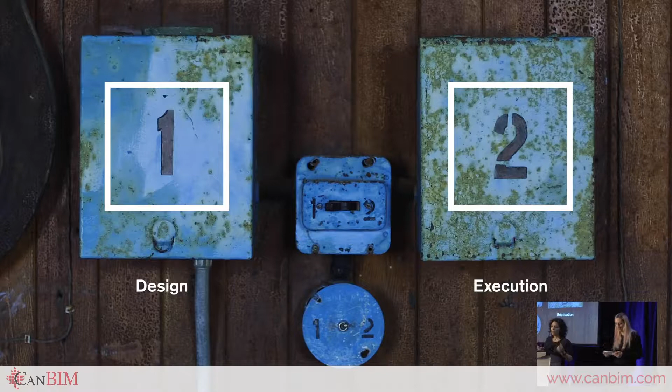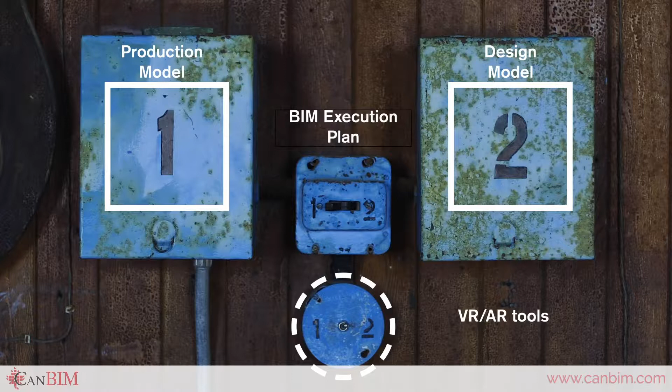As you know, traditionally, you prepare a design, work hard, and then you move straight into execution. With BIM, we realized that we began to work on a production model versus a design model, and the two were alternating constantly, each improving the other. With this rapid, iterative, repetitive process, we were able to extract the most up-to-date information that was best coordinated at any moment in time.

To draw a parallel with this consolidation project, we were consolidating our views through virtual reality. In the project context, it's about the Complexe Desjardins revitalization.

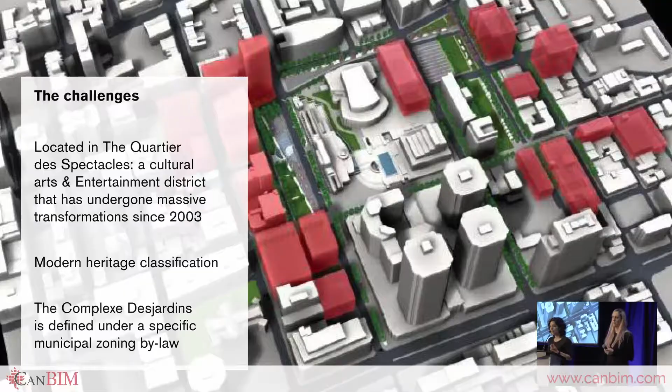It dates back to the 1960s, which is now part of the modern heritage of the city of Montreal. It's regulated by special project regulations. It's part of a new district inaugurated since 2003, called the Entertainment District.

Our mandate was to integrate Complexe Desjardins into its neighborhood and to be able to demonstrate all of its values and functionality. As you may recall, Complexe Desjardins has a central square area inside, often used for various events. It's basically a shopping mall with storefronts, 3 office towers, and a hotel, all connected to the underground city in Montreal.

We began our study in 2014 with a master plan, then developed a technical feasibility study, then plans and specs. Last year, 2 phases were in construction, and this year we're in phase 3, currently underway.

There were 5 different strategic interventions for Complexe Desjardins. 3 were active. The first was divided into 2 construction phases, and the second and third were twinned into the 3rd construction phase. So while the first one was being built, we were working on the concepts and other elements for the overall project vision and to ensure everything was consistent.

For the last one, we divided into 13 stages of execution to carry it all out, and the deliveries were all simultaneous over a scale of a year.

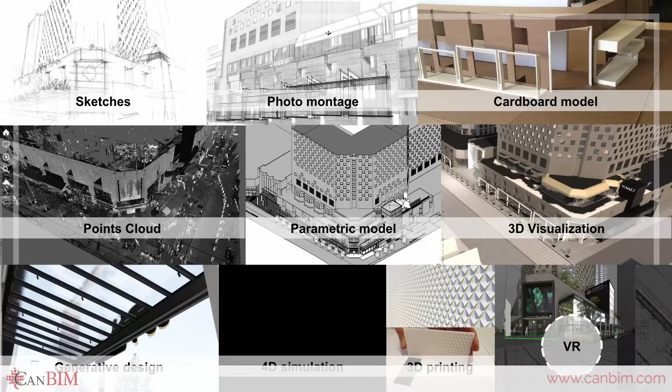We wondered how on earth we were going to be able to communicate. It was such a complex operation. How could we do this as efficiently as possible? So we began with more traditional methods such as drawing, hand sketching, physical modeling, physical mock-ups, and then photos.

Basically for more fundamental design phases, when you're thinking about all kinds of different directions. After that, we started a visualization model based on a parametric model, but we couldn't be sure how accurate it was. We also looked at point cloud data for a more accurate model.

So we would move forward with our visualization and then have the parametric model follow as our decisions were being made.

And then we added exploration using generative design for graphics and for surface motifs. And then we had 3D printing, which we were testing for our surface patterning.

Then we had a 4D model so that we could see the complex phasing of the different work, and then it was all visualized largely in virtual reality. As I was mentioning earlier, this was an opportunity for us to combine our views and avoid redundancy of 3D views and all the various renderings.

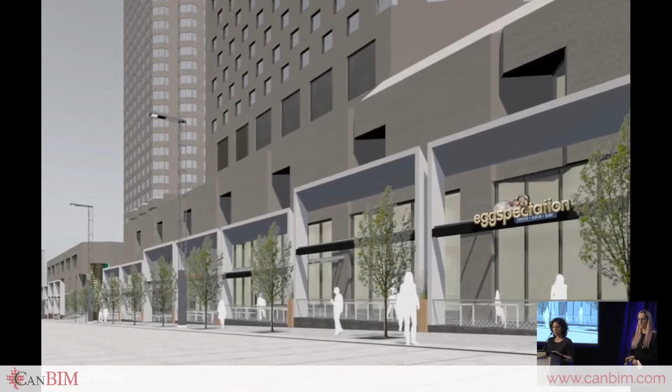Our first intervention in which we used virtual reality was to reposition Complexe Desjardins on the main street of the entertainment district, which is St. Catherine Street. There were already storefronts, so we wanted to have a sort of urban loggia, and each area is defined by a high-performance concrete surround with a beam so that we could have uniform signage and also have rain gutters to redistribute the water.

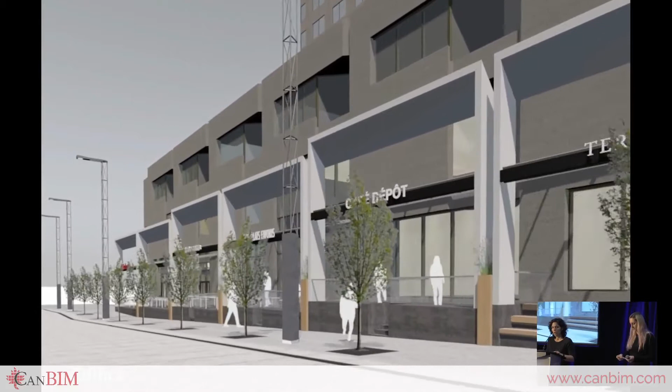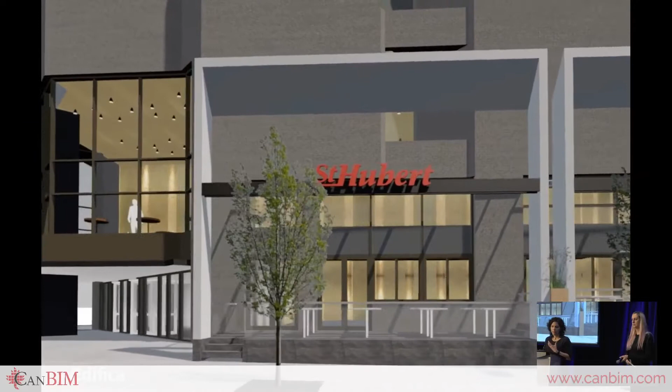Then we had a movable technical floor at the same level as the inside of each of the stores. Every loggia was really similar to one in a theater.

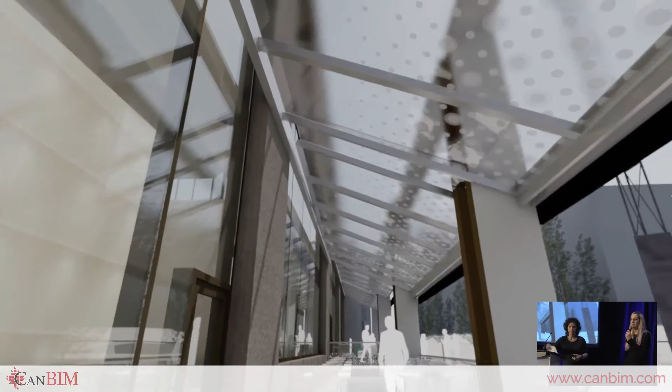So here's animation with our 3D visualization, but we still saw that we couldn't tell what it was going to feel like on the terrace. You need to feel good. How do you know that it's going to feel right?

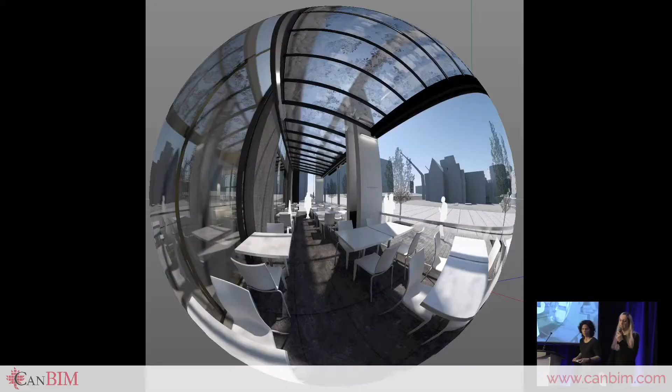So the strategy was to have fixed virtual reality views using a stereoscopic photosphere. This gave us an opportunity to see all the different elements. We'd already decided we wanted to create an arch and have some glass, but we didn't really understand the dimensions and the materiality. So we could look at various options and see immediately how they would interact with each other and what the atmosphere would feel like.

In conventional media, what's often missing is the ability to see how it feels to be somewhere. We often talk about virtual reality presence. For us, this meant that rather than looking at a picture and asking, do I like what I see, we were saying, do I feel good here? Does it feel right? That's what you can't get with any other medium. So we are no longer looking at something, we are inside of something.

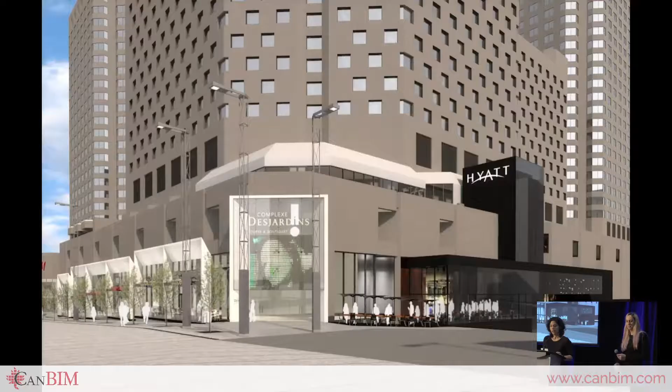For our second intervention, this was our interface with Jean Mance Street, where the hotel's entrance is. The hotel and Complexe Desjardins have two different co-owners. Jean Mance now faces Place des Festivals, and we had to convince the hotel to unify themselves. We wanted the two owners to see this as a common project and to show them they could really have an impact on the street corner and on Jean Mance as a whole.

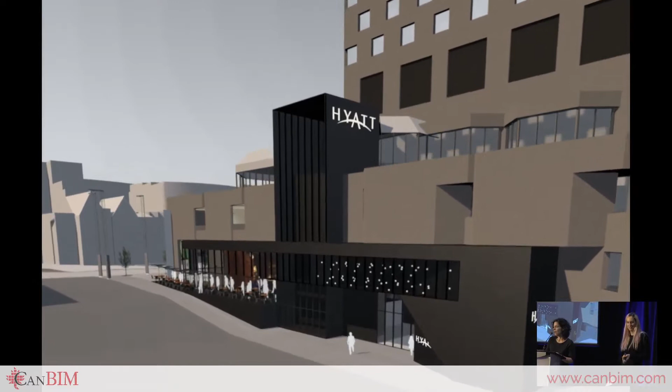So this is a different angle of the same project. The technology works here, but it didn't work at our offices initially. Anyhow, this is a first version—you're just seeing one of the alterations that we used to make our points.

To convince the hotel, the first thing to do was use virtual reality to show them the impact of the project without their presence, with a line between the two owners, versus a unified project. You could really see the difference between the two when they were wearing the virtual reality glasses. The owner is European, so we were able to send the information over and really put them into the proper context of the neighborhood and see what impact there could be. We did receive approval from the hotel for this.

Again, we used the same strategy, virtual reality—in other words, stereo photospheres. We took strategic points that we wanted to validate for a user. The idea was to put ourselves in the user's shoes. What do you feel when you're at different spots? What would our client see? And is that what all the parties want? We want everyone to be aligned with the same vision.

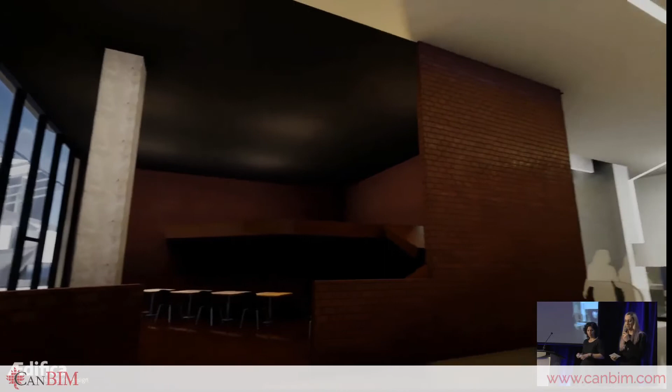So here is a comparison. This is the existing, and here's an interactive model of our intervention. When you come into the Jean Mance entrance, you could see the regular view. It's rather difficult to understand for people, even if we were showing them the corridor.

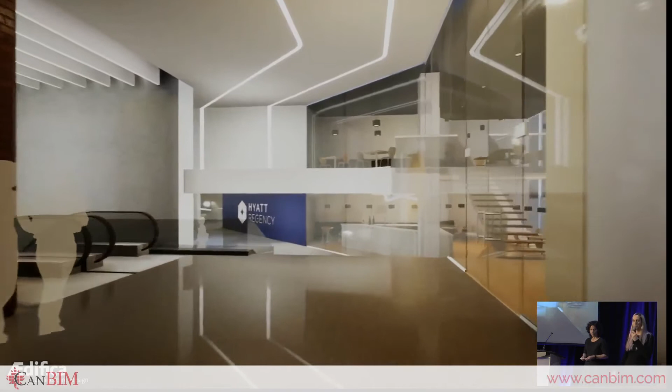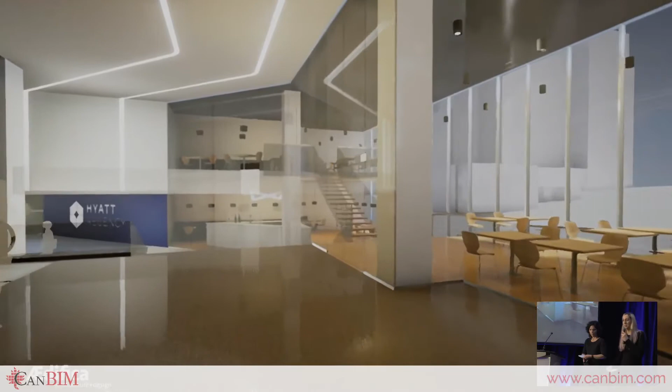If you think of the earlier animation you saw of St. Catherine Street, you saw that visually it looked simpler. That's because you have to have 30 images per second. You have to have separate renderings for each image. Every time there's a change, you have to readjust.

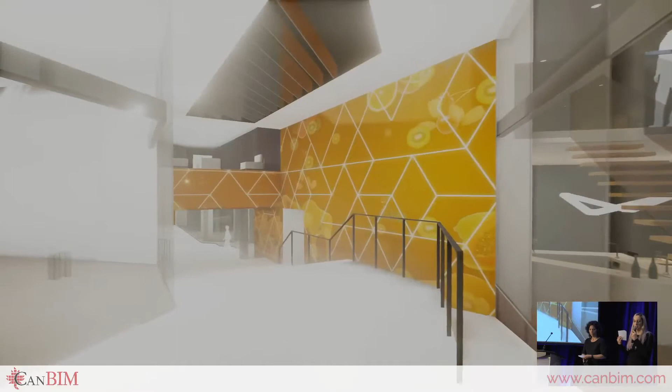So this is a real-time model. You put a camera in, and you let it move, and you're filming in real time. As long as your real-time has been done, you can extract whatever video you want, whatever image you want, to do all kinds of iterations.

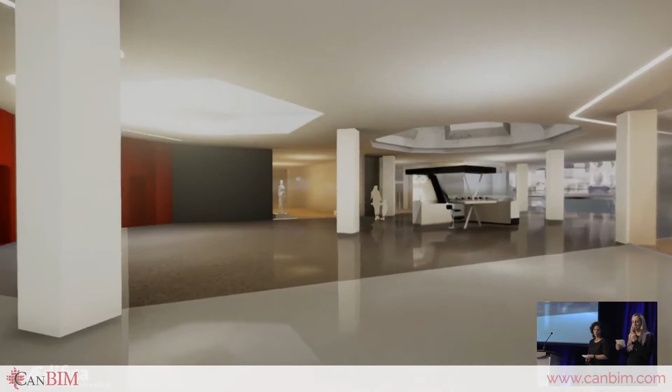You can also make all kinds of changes in terms of texture, lighting. I could see that people who went through my screen were making many more valid comments instead of saying 'oh, what's this or what's happening here,' like they would with regular screen renderings of software modeling. They had a much more specific idea of what we were trying to do.

So here, the model was in the client's hands, so I had to test for collisions to make sure they weren't walking through any walls or floors. It's just like we do for video games.

We wanted to emphasize the demolishing of a beam that was very important. We wanted to make it into something fun, so we're saying we'll demolish it, we'll have it explode. It was a way of making it more fun.

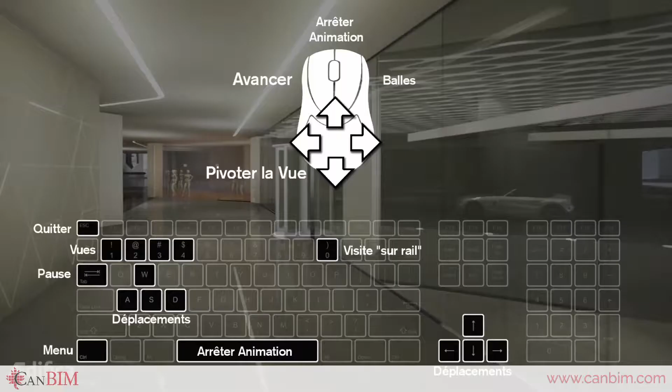Now, as I said earlier, this interactive experience was in the client's hands, so this requires being there with them. Not every client is used to walking around in, like in a typical video game.

So we created instructions, which I integrated directly into the application, which we delivered by USB key with the hard copy as well, and they were able to visit at their own pace. We did everything to make sure that they would understand.

The app begins with a guided tour, as you saw earlier in the video, and then they regain control and they can explore literally by walking through the corridor, going from side to side in either direction. They could also use points that we targeted in advance.

So we try to support all levels of expertise when you're having this kind of interactive experience.

Here you have what's behind the application. It's a blueprint—if you're familiar with Dynamo or Grasshopper, it's a similar system for visual programming. It's fairly simple, actually, when it's properly organized. So here you have all of the logic: when to start the video, how to stop the video, what to press to have what happen, how to move from A to B, etc.

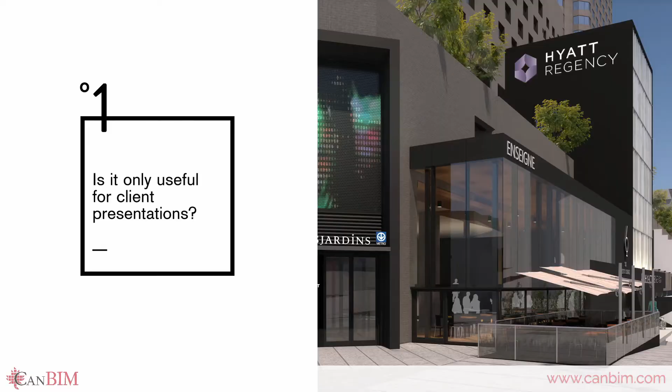So the experience led us to some conclusions that we'd like to share with you. First of all—is this just useful for client presentations, Julie?

No, virtual reality really made it possible for us to develop all kinds of options. We were able to show clients how things were evolving fairly quickly, and we got client buy-in for every phase of putting the pieces together very quickly.

We also brought the glasses to the city in terms of any changes that we wanted to make. Having a more digital project meant that we could really see the integration—what level, what density, what kind of light was there going to be, what kind of lighting did we have. We could even convince our president to be sure that everybody was comfortable with what we were proposing for Complexe Desjardins.

On my part, I can ask you what the impact was on our work and our processes. Well, I think that virtual reality is on a spectrum between the abstract and the concrete. If you look at our traditional methods or regular plans, you're at one extremity of the abstract, whereas when you're talking about virtual reality, you're talking about concrete experience. So each approach has its pros, but if you combine the two, you really can get a synthetic vision of the total intervention, and you can also see what it feels like to be in that place. So I think they're really complementary, and it's an opportunity for us to change the way we see things. The fact that we are not looking at something through a rectangle, or not seeing a picture through a rectangle, is maybe something that could make it possible for us to design differently and even think differently about our projects.

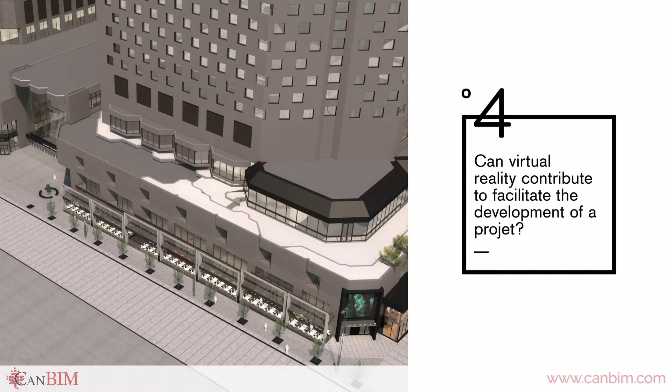Things happen really quickly. Now, perhaps only time will tell whether the virtual reality vision is not just a new gadget, not just something fun, but actually contributes something. Some people are not so sure.

I imagine that by being doubters, even when they're dealing with a very faithful reality simulation, people always worry if it's really going to look like that when it's built. So are we just trying to seduce people with pretty pictures, or are we actually showing and demonstrating something that's reliable?

I think perhaps only time will tell, and perhaps our experiences and habits will dictate that as well. So what about you, Julie? Do you think that virtual reality can contribute to facilitating building projects? Yes, well, through various phases. I've seen it over various phases in various years. We were able to demonstrate regularly because there were changes. Personnel changed over time. We could bring people up to date quickly, especially if things were urgent. So it was really a terrific tool.

What would be good to improve in our next process is really for contractors to use the glasses more. We use the glasses a lot for clients and approvals required for the process, but we'd like to use it more on site, because 75 pages of plans to analyze takes a long time, and I think it would have been easier to imagine the final project and the issues in the entertainment district when there's only certain areas and times for construction, and there's a lot of consequences on everybody. So I think it was really a useful tool from beginning to end.